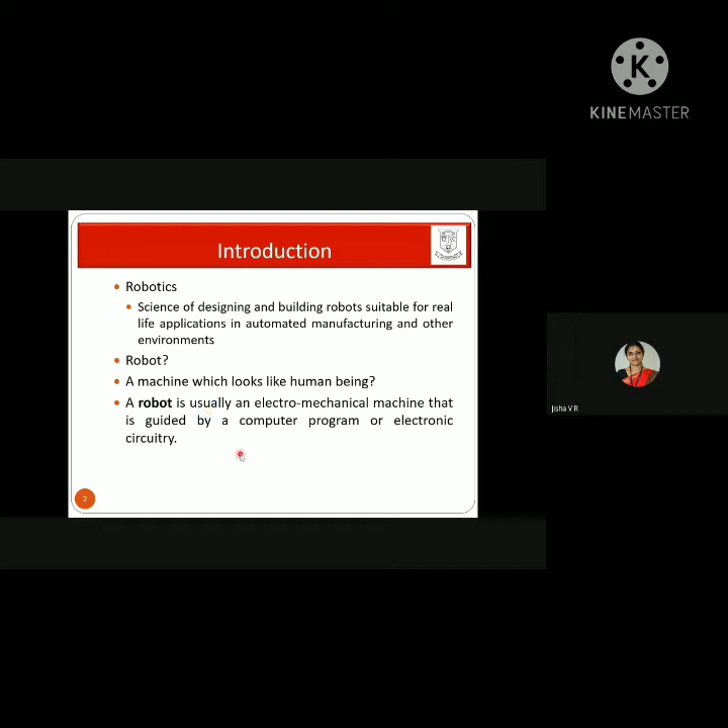From a layman's perspective, we can define a robot as an electromechanical machine that is guided by a computer program or an electronic circuitry. This is not the formal definition of a robot, but to start with, I thought I'll introduce this definition, and let's see which are the different types of robots which we are aware of.

This is a famous concept which all of us have in our mind when we were young - that robots are only the ones which are looking like human beings. This is the famous Honda Asimo robot, and this is another humanoid robot developed by another laboratory.

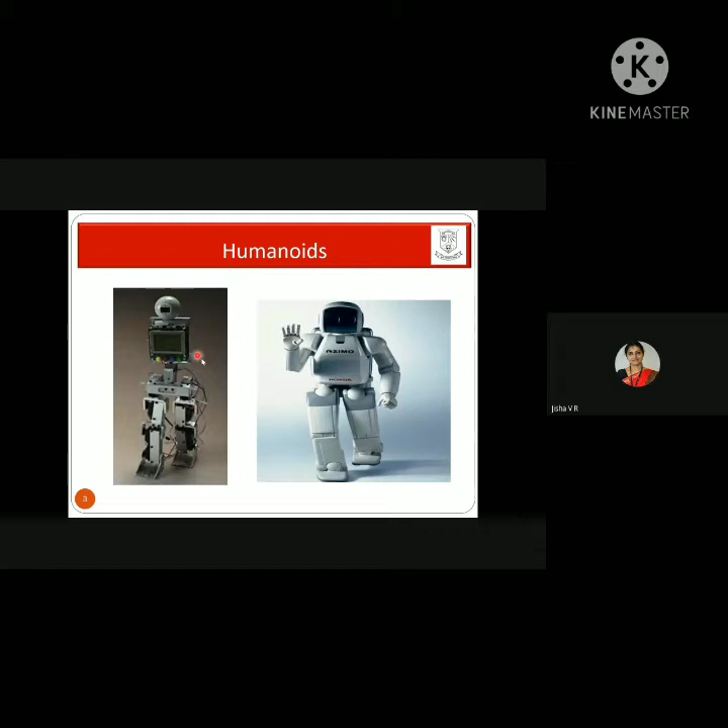In addition to that, these are also robots - robotic arms or robotic manipulators. They are actually occupying the major share of robots in industry. You can see it's like our human arm, right? Robot arm means there'll be a base, and some links will be there, joints will be there. So this class of robots is referred to as robotic manipulators.

Another class of robots are called mobile robots. They can be either wheeled or legged robots. What I'm showing you are very simple robotic configurations like differential drive robots, and some advanced robotic configurations like this Pathfinder, where you can see more wheels are there. Here also, this is an advanced mobile robotic platform with a manipulator attached. In this case, you need to have coordinated control of all these configurations, because there'll be motors in the wheels as well as motors in the links of this arm also.

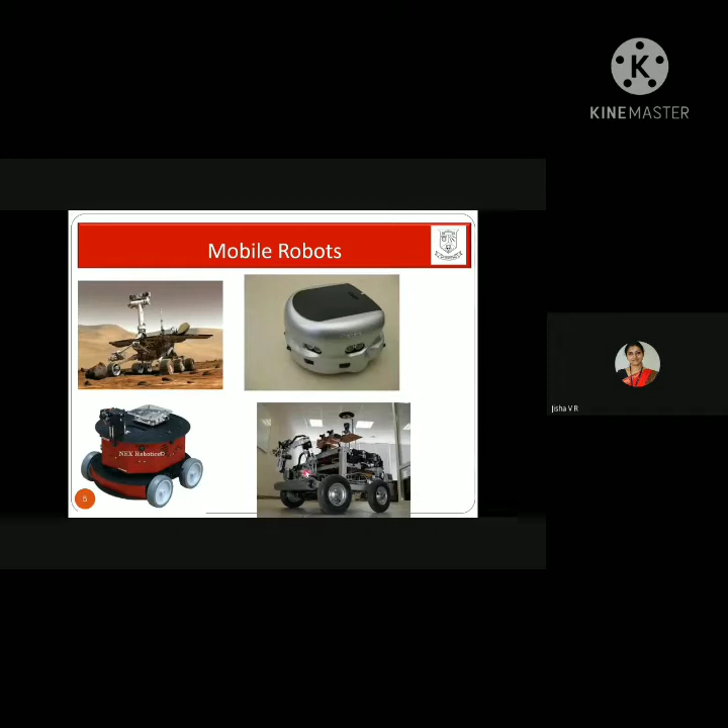Another class is UAVs - unmanned aerial vehicles - which are classified as aerial robots or flying robots. They can be in the miniature form like this, or they can be in the quad rotor form, where there are 4 rotors which are generally driven by BLDC motors.

So if you look at, there are one more class of robots which are called underwater robots. So there is a very wide variety of robotic configurations available nowadays. Through these pictures, what I wish to convey is that we have all these kinds of robots in addition to the typical humanoid robot which were in our minds during our younger days. So these are the main class of robots which are available.

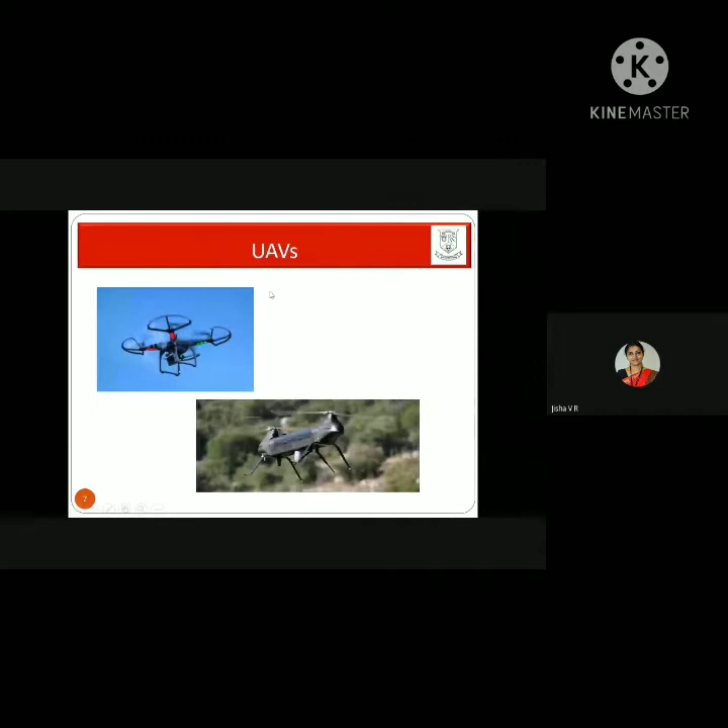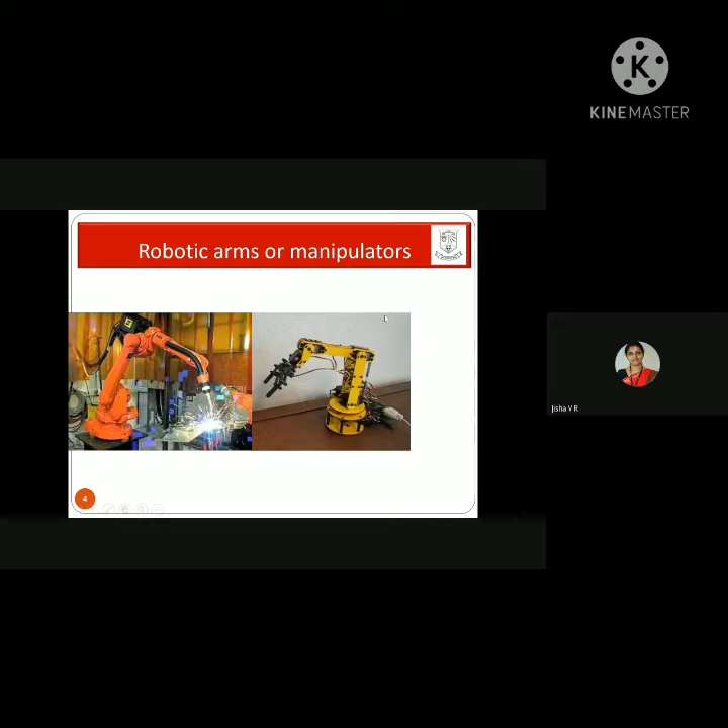So if you look at all these classes of robots, this is leading because now in manufacturing industries, in process industries, if you look at the automation, all automation has been achieved by means of all these robots. So if you take a total count, around 85% to 90% of robotic population are robotic manipulators or robot arms, which are like our human arms.

So now I move on to the formal definition of a robot. This was a very simple definition which I have given for what is a robot. But according to RIA, the Robotics Industries Association, a robot is a reprogrammable, multifunctional manipulator designed to move materials, parts, tools, or specialized devices through variable programmed motions for the performance of a variety of tasks. From the definition itself, we have an idea of what is basically a robot, and this definition justifies all those we know.

And this word robot has been derived from robota, a Czech word meaning forced laborer.

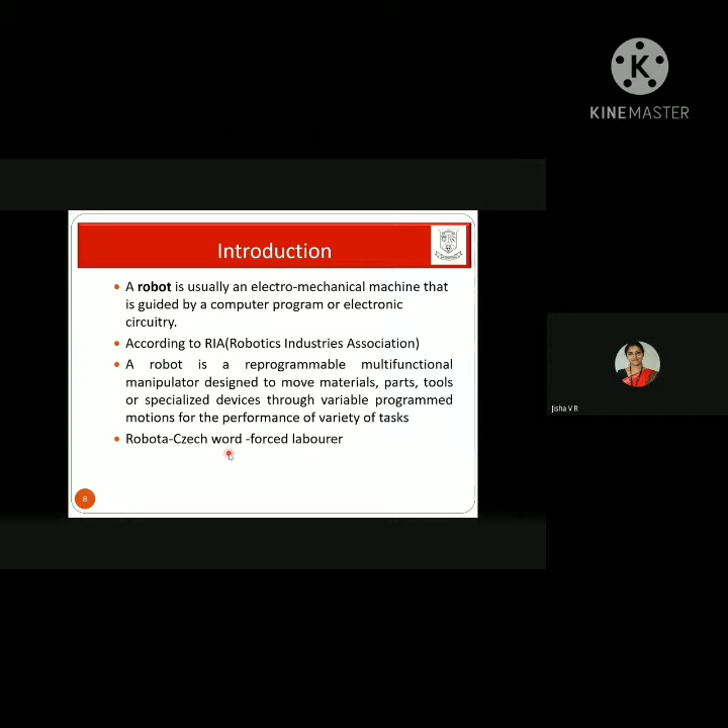So in the upcoming sessions, maybe today afternoon, tomorrow, day after tomorrow, you will be taken through some basic concepts of robot transformations, coordinate transformations, robot kinematics, dynamics, robot control, path planning and all. Once you go through all these sessions, you'll understand that a little bit of math is involved when we have to derive the kinematic model or dynamic model of robots. So I'll tell you why we should learn all those things for actual design of robots which are beneficial for society. I'll just start with a general trend which we see.

Even though we are not formally learning robotics as a subject, our students are coming up with good projects of robotics. For example, consider a pick and place robot. Suppose that robot is used for picking a particular bottle from a particular point and placing it at some other point. Generally what the students do is, from the available motors they have, because we need motors for actuation and we need links, they'll take L brackets, C brackets and all.

They will try, okay, whether I'm able to take this bottle from a particular point A. By trial and error, they will check whether I can take the bottle from here. This is the first attempt. This is not working. So then they'll try here. This is also not working. So they'll try another point. So when the bottle is kept at this point, the robot is able to pick the bottle.

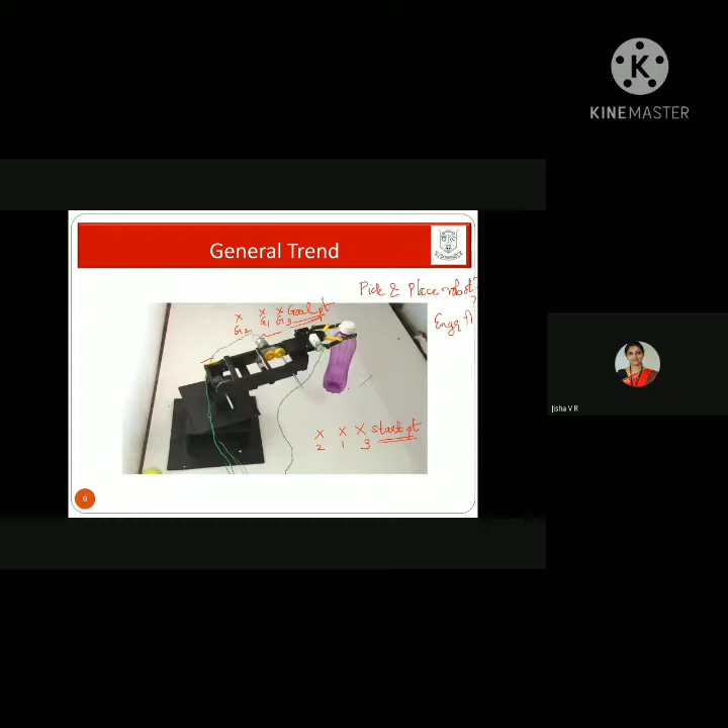So a customer, as engineers, what we are supposed to do is, suppose an industry is to be automated, and there'll be a conveyor mechanism which is moving like this. Let's suppose this is a conveyor mechanism from where some bottle is to be taken, and there may be some other mechanism where an arm is kept at this point which has to pick this bottle from here. So this must be the start point and this must be the goal point for a particular application. Then how will you achieve that?

After designing and building this particular robot, I cannot do anything to change the start point and goal point simply like that. I will just demonstrate with the help of this example.

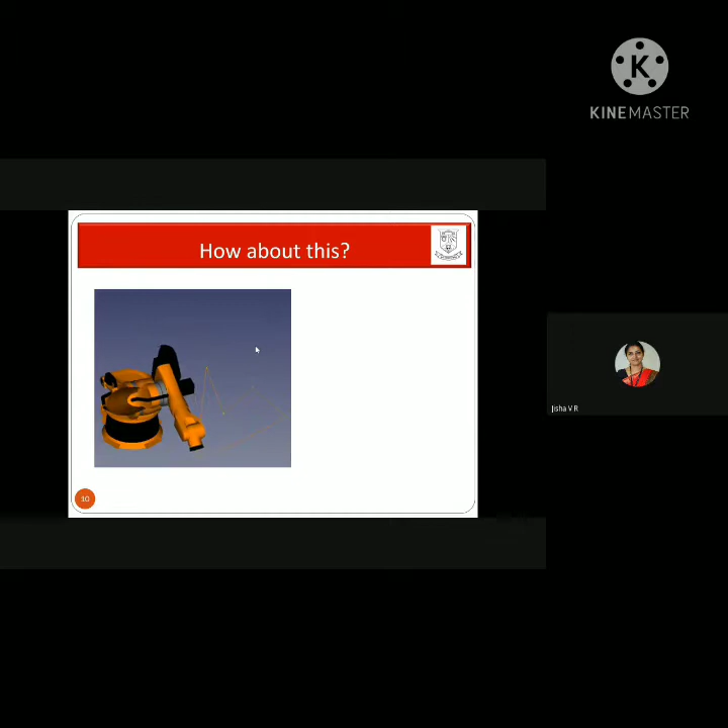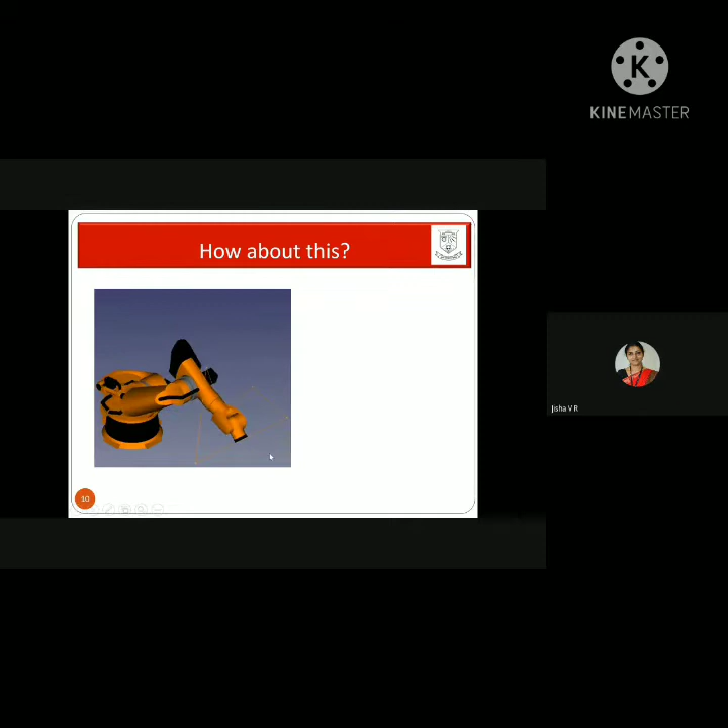Suppose the robot end effector has to move through this path. Just imagine this is a fixed path which is required in a particular industry. A customer comes and asks the engineer, I need a robotic manipulator which picks and places objects through this path. Or suppose the robot is to pick from this point and place at this particular point itself. So this is given to you, these particular points and all. If you try to build this without knowing kinematics or dynamics, you will not be able to do that.

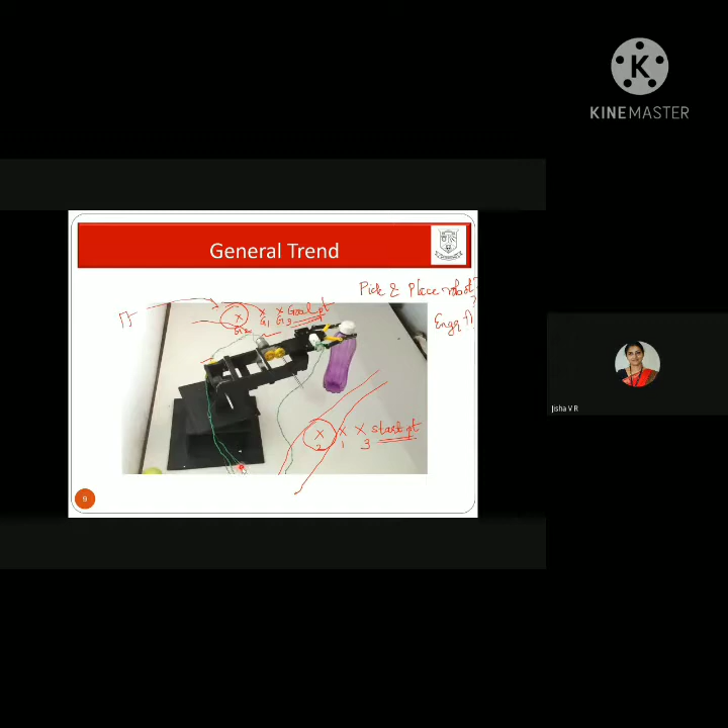So if you have a practical problem before you to do tasks in this way, or the second case with a specific point, there is no flexibility in start and goal point, because there will be many robots kept in series for automating a process, right? You cannot simply change the pick and place points. So how will you do that? You must know kinematics and dynamics, and further trajectory planning and control, all those things.

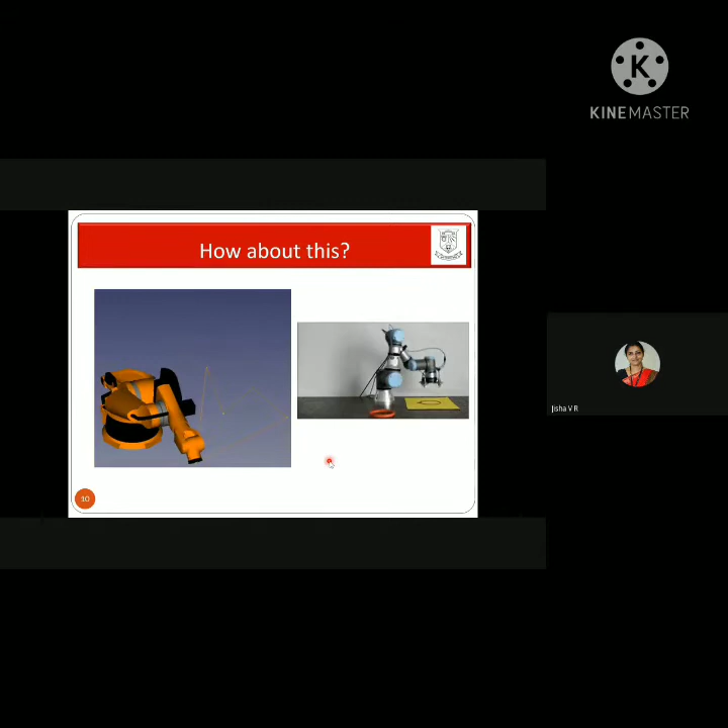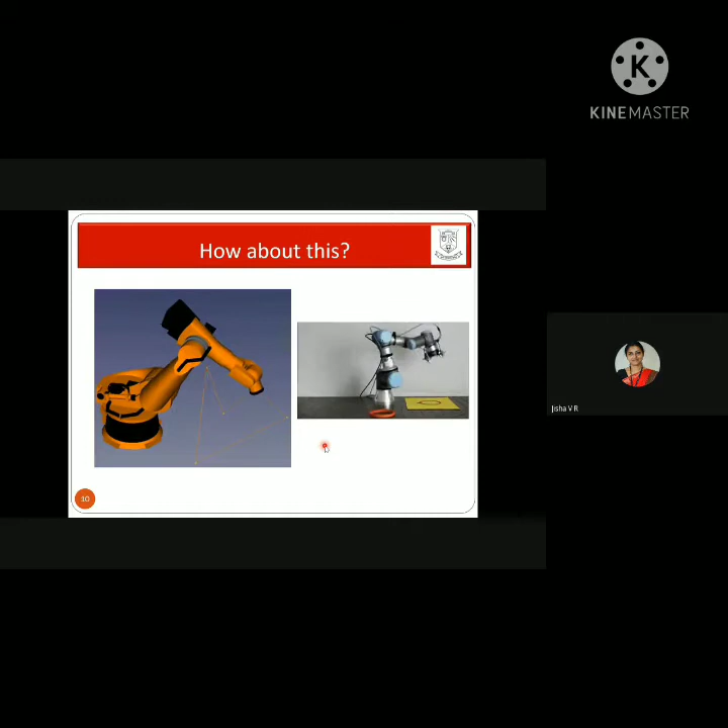Only then will we be able to implement these kinds of applications. Otherwise, what we have to do is by trial and error, we build, and take some approximate start point and finalize an approximate goal point. Is that what is required as engineers? No, right? As engineers, we should say, yes, I have to take from this particular start point to this particular end point. That is very, very important.

All of us will be aware of another application demonstrated by students, where there will be a line and the robot has to follow it. Wherever that line is, the robot will successfully follow that. But can you ever imagine a robot following a line or circle without it being drawn? Can you just imagine a circle or a straight line drawn virtually in front of you, wherever you are sitting right now, maybe at home or in your college staff room, and move through that?

I'll show you an example where my B.Tech students have done this project. You can see that no circle is drawn, right? But it is following a circle. Can you imagine a circle like that near your staff room or wherever the project is being taken up, with no line drawn, and still the robot is following a circle? How can that be achieved? Without knowing kinematics and dynamics, you won't be able to do that.

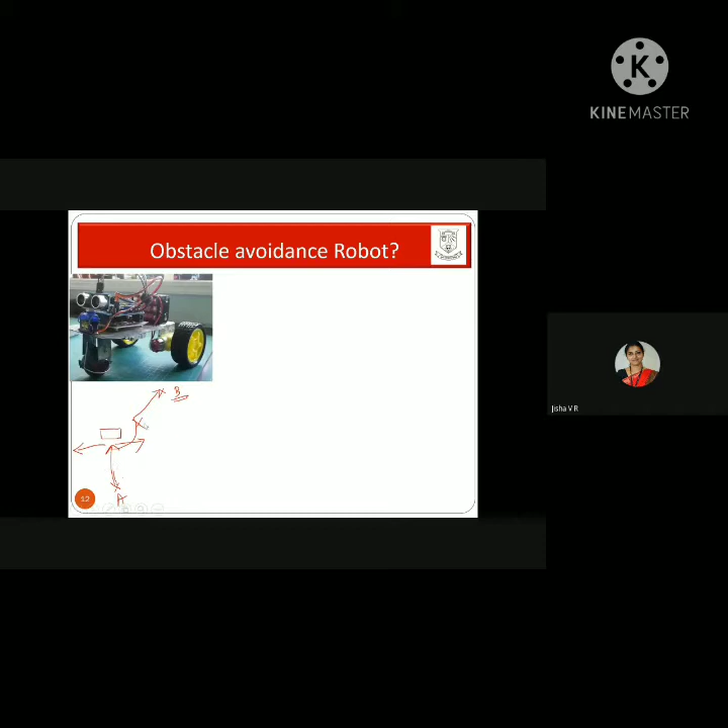What it should do is avoid the obstacle, and then go back and reach the destination point. So whenever we are asking our students to come up with projects, we should not just encourage them by saying it should take a right turn or left turn. It should be moving to a goal point, and while avoiding obstacles, it should be able to reach the destination, like in this scenario: from start point to end point, avoiding obstacles, it is moving. In this way, we should be able to design robots capable of doing all these tasks.

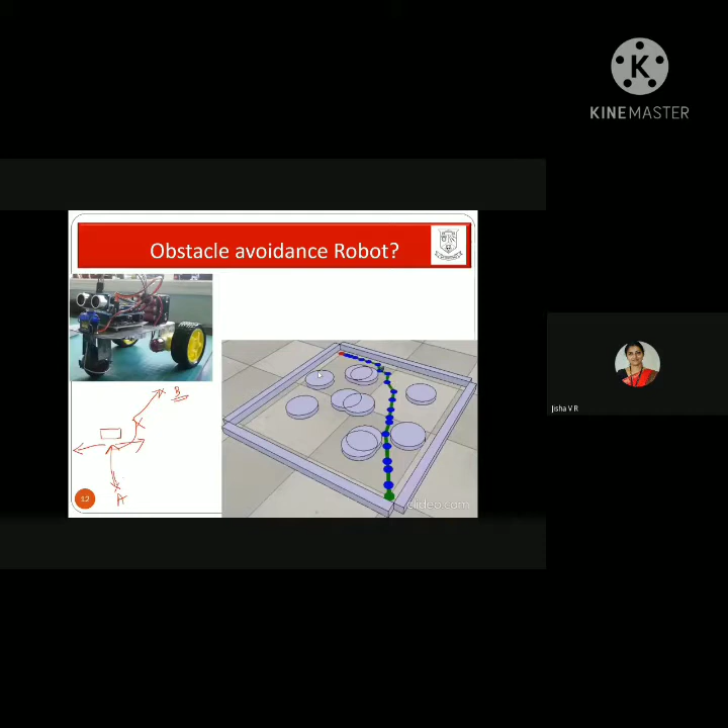Whenever we employ a robot for a scenario like a hospital, robots are really helpful in distributing medicines and food packets to COVID affected patients admitted in different rooms, in pay wards. The food has to be delivered, and while the robot is moving, it may encounter obstacles, so all this should be kept in mind. I've shown these three examples because only if we know the kinematics, the dynamics, trajectory planning, and robot control will we be able to come up with these kinds of projects which are helpful for society.

So who all will be able to contribute in robotics? Basically, robotics is an interdisciplinary area which includes many engineering disciplines: mechanical, electrical, electronics, computer science, etc. If you are a mechanical engineer, you concentrate more on the design part because you will be an expert in that. Suppose there is a wheelchair that is to be moved through a stair, a stair-climbing wheelchair. For that application, a mechanical engineer will be able to help us in the mechanical design part, because they are very good at that.

So that's where the mechanical engineer can contribute, but for the same stair-climbing wheelchair, the control part and integration can be done by electrical engineers. If there are sensors and all, both electrical and electronics engineers will be able to do that, depending on the application. If a camera is involved, a lot of image processing, electronics, sensor fusion and all are involved, electronics engineers can contribute. And computer engineers or computer science engineers can contribute in development of optimal algorithms for implementing or realizing all these robots. So all these people will be able to contribute in one way or another.

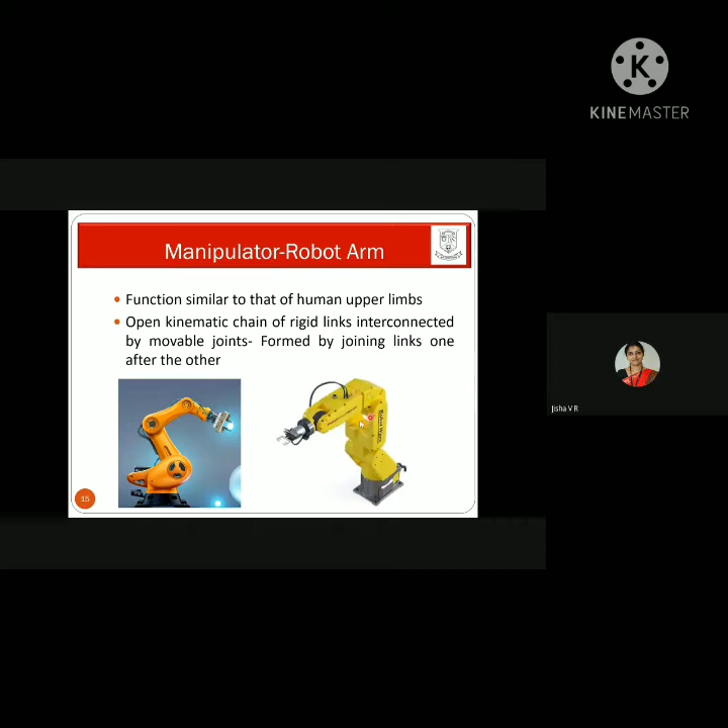So then you need to have force sensors or torque sensors attached to the robot in order to know how much interaction force is coming, and accordingly the torques are to be given to the joint. So if you have to make a robot autonomous, all these sensors will be required, and definitely the brain part of any robotic arm will be the controller, which controls the motion.

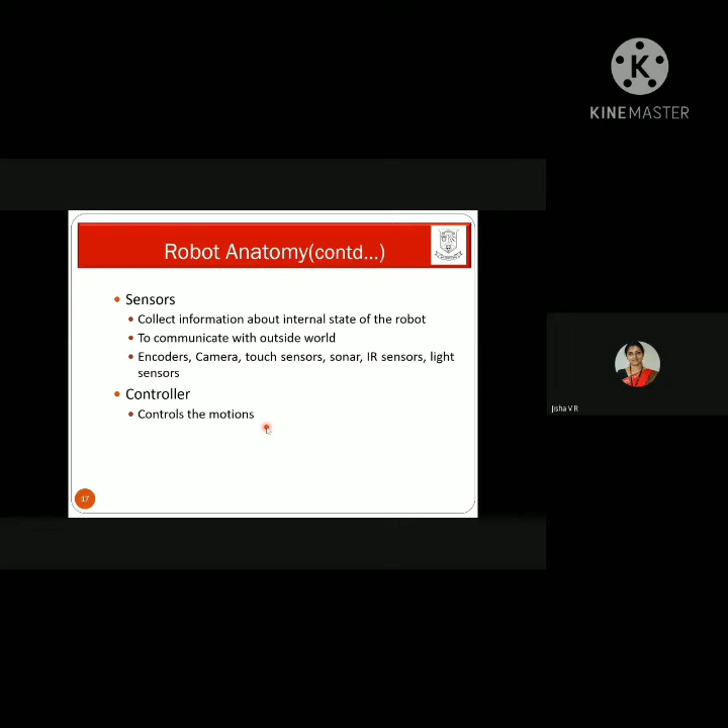Depending on the requirement and the ruggedness needed, you can choose the required controllers. Now, as I was mentioning earlier, if you look at the main parts of a robot, I'm just mentioning the basic joints - there are other advanced joint configurations too.

The common joints are revolute joints and prismatic joints. Revolute means - see, with respect to the second joint, these are the links. This is the first link, this is the second link. When this rotates, this joint rotates about this axis. So this is called a revolute joint.

If you take the joints in a human arm, extend your arm - can you check whether our joints are revolute or prismatic? All our joints are revolute in nature because we can only rotate. There is no possibility of extension like this.

Prismatic means it is sliding. There will be a fixed link and a sliding link like this, so there is a linear motion in this way. That is called a prismatic joint.

The next important point we should know is the work envelope of a robot. Work envelope means the locus of points in 3D space where the end effector can reach. This is very important because a customer comes to you and asks...

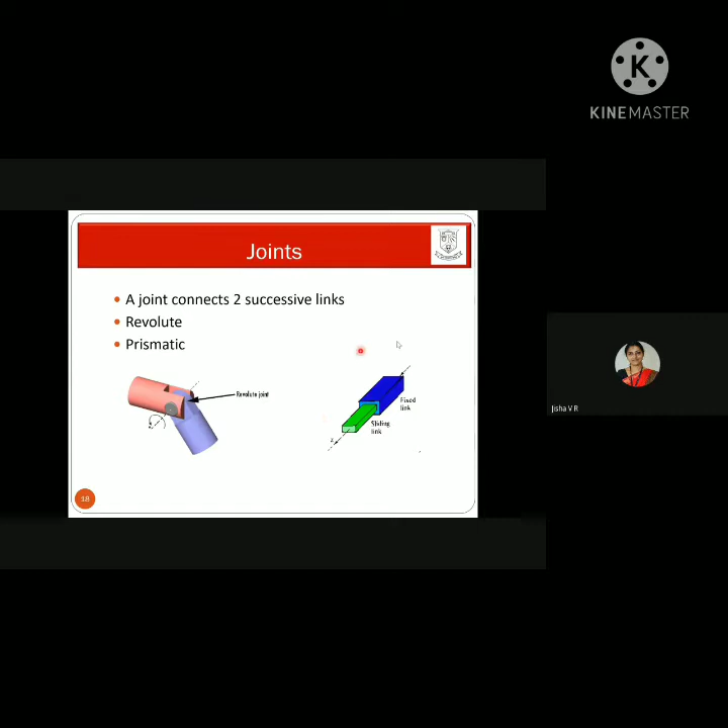So if you look at these types of joints, the configuration is prismatic. I can say that if you take a Cartesian robot, the joints are prismatic, prismatic, prismatic. We call it the PPP configuration, which is a very basic configuration, and it's also referred to as a rectangular robot.

If you are employing this kind of robot, the work envelope you get is going to be a rectangular box like this. So suppose the work envelope required for a particular task is within this box, we can go for this basic rectangular robotic configuration.

Sometimes that may not be the case - sometimes the application demands that we need a cylindrical configuration like this.

So this is actually a cylindrical robot wherein the first joint is revolute, second joint is prismatic, and third joint is prismatic. So the configuration is RPP. If you use RPP configuration, we call that a cylindrical robot, and the work envelope generated is cylindrical in nature.

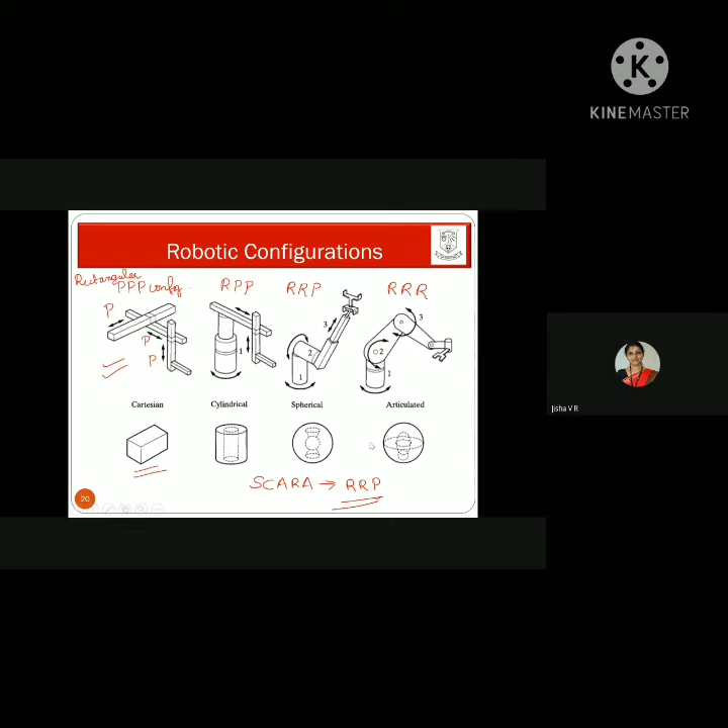And Puma is a very famous configuration, a 6-axis robotic configuration. All these robotic configurations we've considered only the first 3 axes. The first 3 axes determine the work envelope, and the remaining joints are referred to as the minor axes. For demonstrating the importance of minor axes, I'll switch on my video.

Hope you can see — suppose this is my mobile phone. I have to place this phone from a particular point on the table to some destination point. Initially the mobile phone is at this point, and it has to be kept at this point. If you look at this configuration, this is the position of the robot. I'll feed the CG of this mobile phone to the manipulator, and the manipulator will keep my mobile phone like this.

So if you have to keep the mobile phone only at this particular configuration, 3 degrees of freedom is fine. But sometimes you may have to achieve a configuration like this — same position, if you look at the XYZ of the CG it is the same, but the orientation is different. This is another orientation, and this is another orientation.

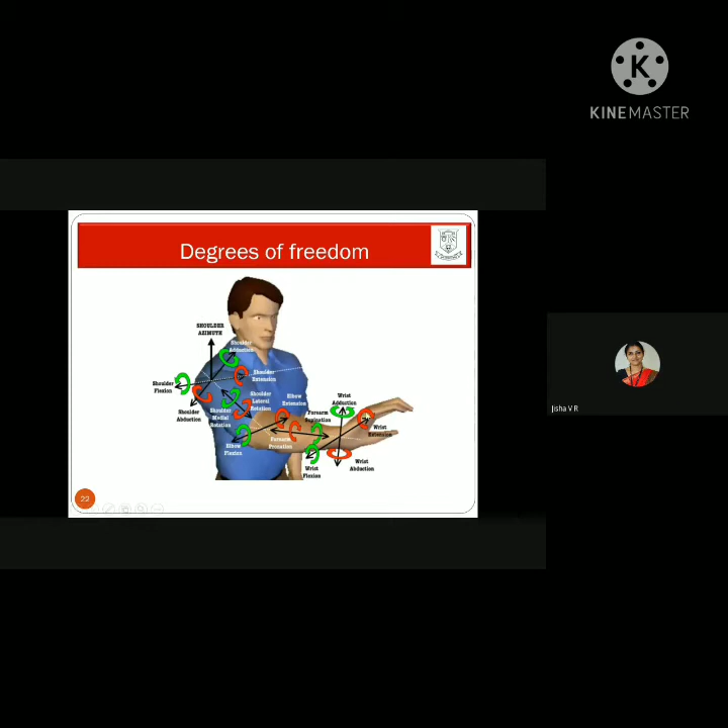So when we try to realize or design a robotic manipulator with all these degrees of freedom, we'll understand the difficulty. We start with the kinematic model, and if more payload is to be taken, then we go for a dynamic model. All those become complex when we consider our own arm. So we need to know, for a particular application, we need to know...

...how many degrees of freedom are required, whether only position information is to be shown or achieved, or different orientations are to be achieved, and depending on that, we choose how many degrees of freedom the robot needs.

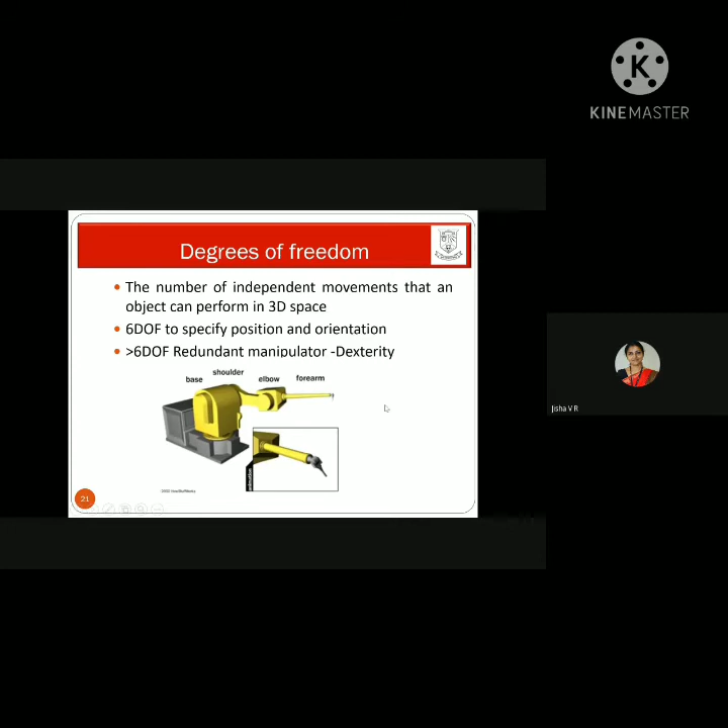And in robotics, one of the important topics we'll be learning is coordinate transformations. Coordinate transformation is used to model the motion of the robot arm. Coordinate frames are attached to various parts of the arm, and what we do is attach right-handed orthonormal coordinate frames. I'll show you - this is what right-handed orthonormal coordinate frames look like, attached to robotic arms.

Generally, you might know the analysis of different systems, like if asked to model an electric motor, you all know how to do that. And if I ask you to model an electric vehicle or an autonomous car, you know how to model that. But when we consider a robotic arm, there is some difference - unlike a car moving on a road, or some other machine, or a mobile robot moving on a floor, if you consider a human arm or a robotic arm, the analysis of movement is a little more complex.

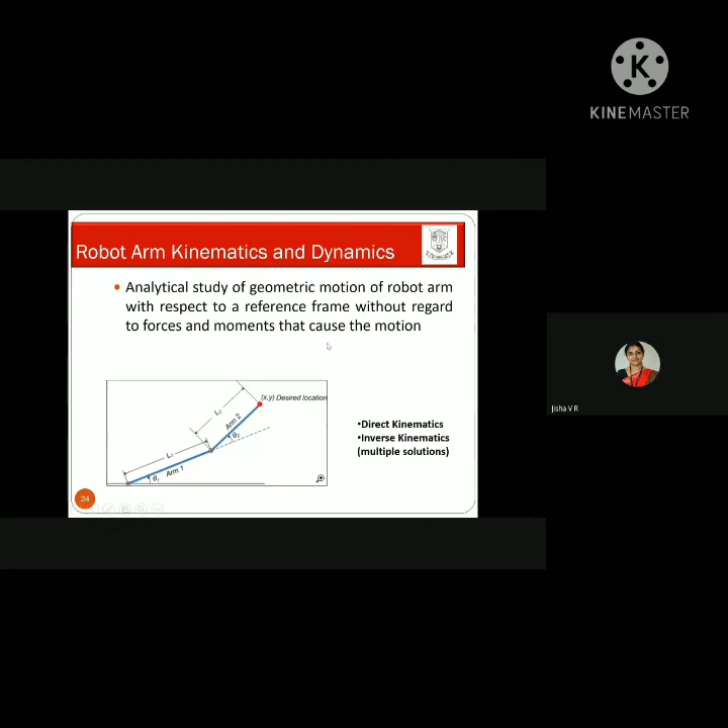I always strongly believe that being engineers, we should rely on engineering solutions rather than trial and error solutions. So when payload is involved, we should try to find the dynamic model and then find the torques required at the joints, or in the case of mobile robots, torques for the left wheel and right wheel.

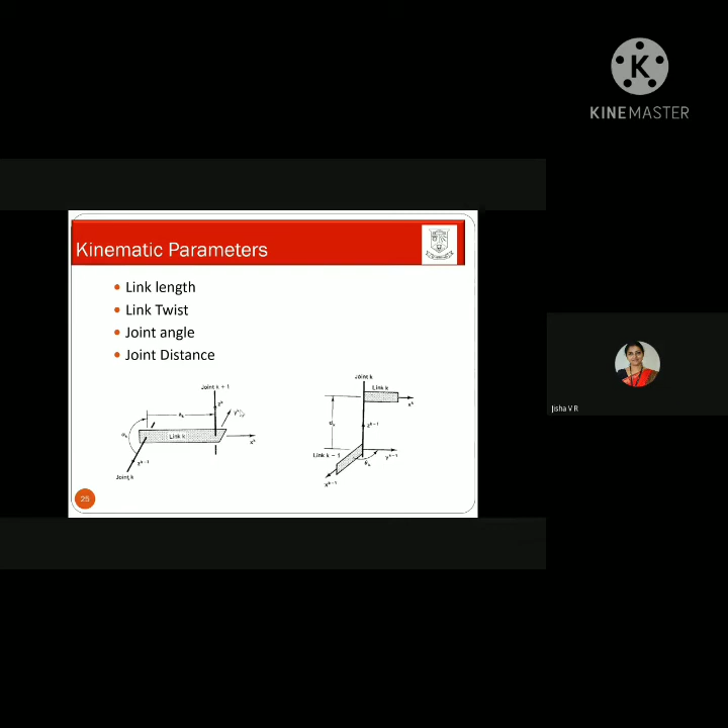These parameters like link length, link twist, joint angle, joint distance are all required for finding the forward kinematic model. All these things you will be studying later. I was just setting up a foundation for why we should learn all this, so that we'll be able to successfully design a robot for supporting society. Ultimately, this is what we do.

Frames are attached based on the Denavit-Hartenberg assumption. These frames are to be assigned and coordinate transformations are to be found. There is something called a link parameter table, which is written in order to find the end effector position and orientation with respect to the base.

Once you do that, you will always know the model before designing, so that we'll be able to implement them successfully depending on the customer requirements. So the next terminology which you may hear in upcoming sessions is trajectory planning.

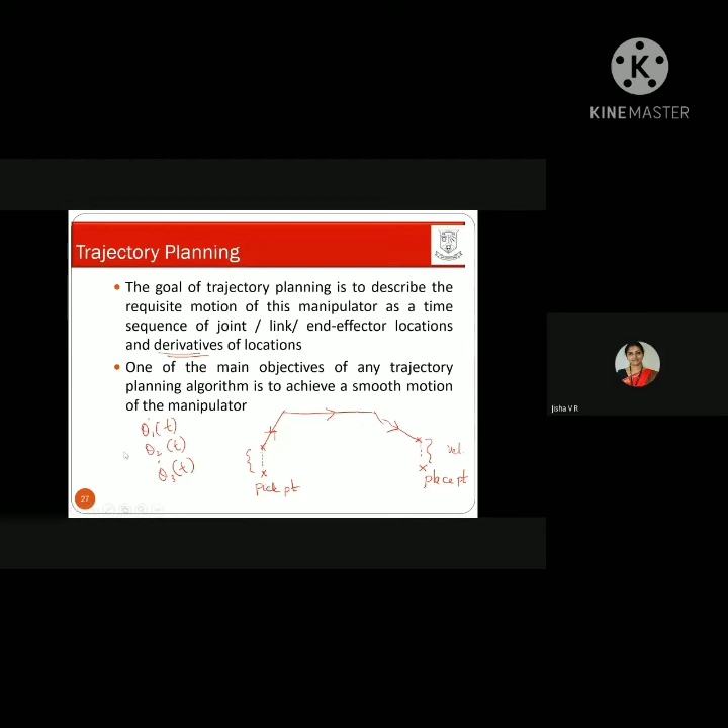The last topic I will be mentioning today is about robot control. Once a nominal trajectory is planned, the problem of issuing commands to the joint actuators that will cause a manipulator to faithfully track or follow the planned trajectory is called the robot control problem. So this is actually a systematic way of implementing a robot.

First you need a kinematic model, and suppose the payload is less, then it's fine - you can directly go for trajectory, then find the Jacobian matrix to get the joint velocity and end effector velocity relations, then trajectory planning, and then directly robot control. But if the payload is more, you need kinematic model, dynamic model, trajectory planning, and then robot control. If the manipulator moves very slowly or moves one joint at a time, control is very simple because coupled dynamic forces will be negligible.

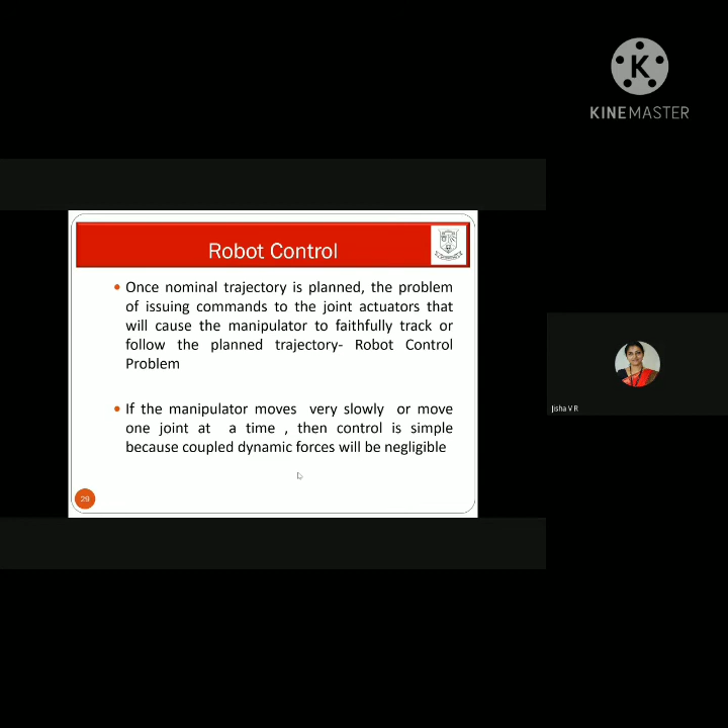There are some assumptions in robot control wherein we can use single axis PID control: that only one joint is moving at a time and the robot arm is moving slowly. But if it is moving fast and has a higher payload, it's better to go for non-linear control methods like computed torque control. Otherwise, we can use a very simple single axis PID control or PD gravity control, for gravity compensation terms.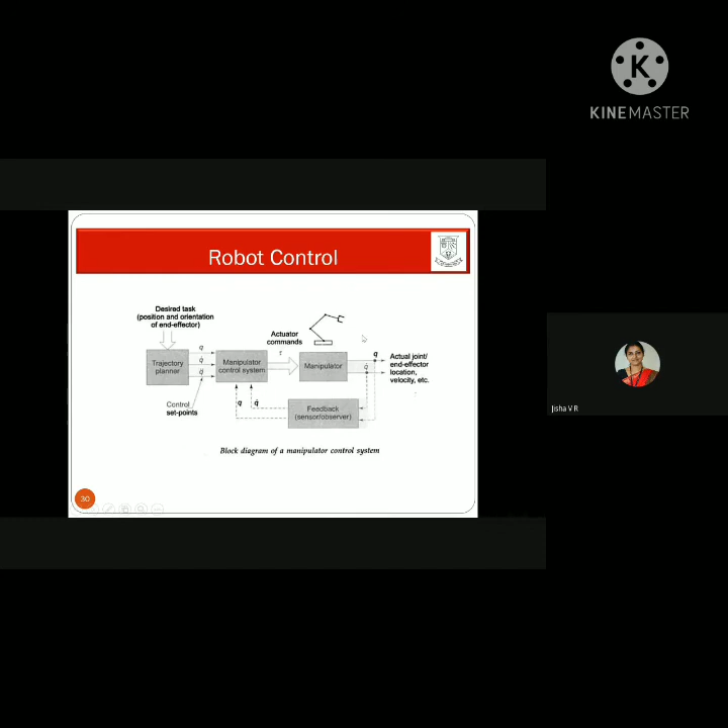From the desired task and position, that will be the position and orientation of the end effector, which is given to the trajectory planner. The trajectory planner computes q dot and q double dot required, and that is fed to the manipulator control system. We know what is the actual q and q dot, and that will be compared, and based on the error, this manipulator control system will be correcting or moving the manipulator in the required path. Okay, so that's a typical robot control block diagram.

So that's all. Based on the type of system, suppose only one joint is moving at a time, and the robot is moving very slowly, linear controllers might be okay, but otherwise we may have to use non-linear controllers.